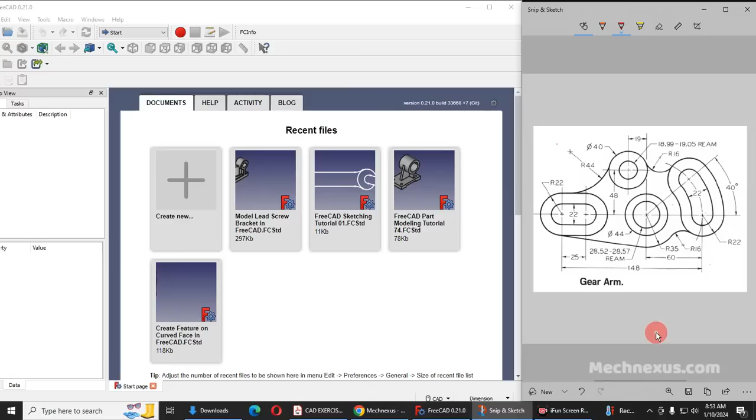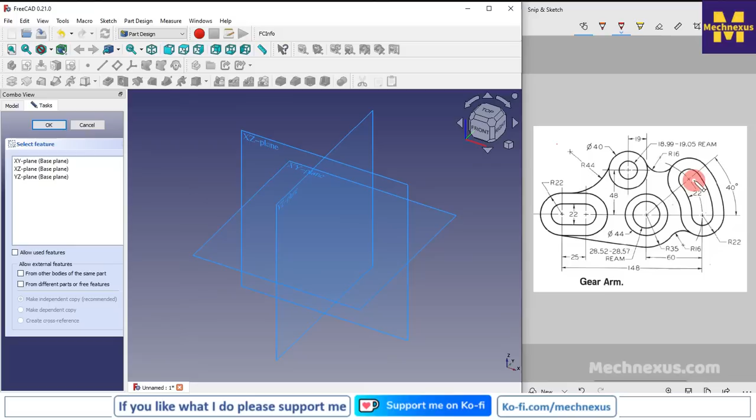So here I will close this startup page and I will switch to Part Design, create a new file, create a body, create a sketch. As we are going to just do the sketching practice, we will select this front plane and create our sketch. So before starting the sketch, we will understand the base feature of the sketching.

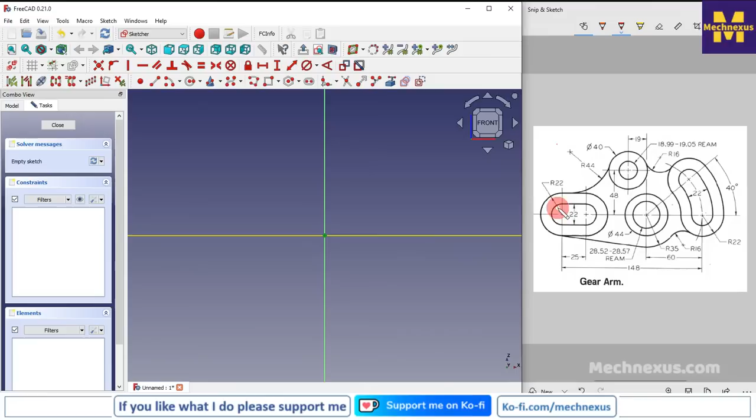If we read the drawing, we can find that these slots and this hole are the major features, and based on these major features we will make this one. So it is advisable from my end to target your base feature. In this sketch our base feature will be this circle at our origin point, and based on that we will draw one feature at a time and complete our sketch. So let's start.

So I will create two circles, and now we will read the dimensions: the outer one is 44 and the inner one is 28.57. We will consider the maximum. So first I will select the inner one and give the diameter 28.57, say OK, and now the outer one is 44. Now I will move my dimension. So this is the base feature which we have drawn.

Now we will make this slot feature. In sketching you will get the slot tool here, just to create a slot, and now we will give the dimensions. If we see here, this dimension 148 is from this slot center to this one, but this center to center dimension is not given. So what we will do, we will create a circle here with the circle tool, and this will be of diameter 22.

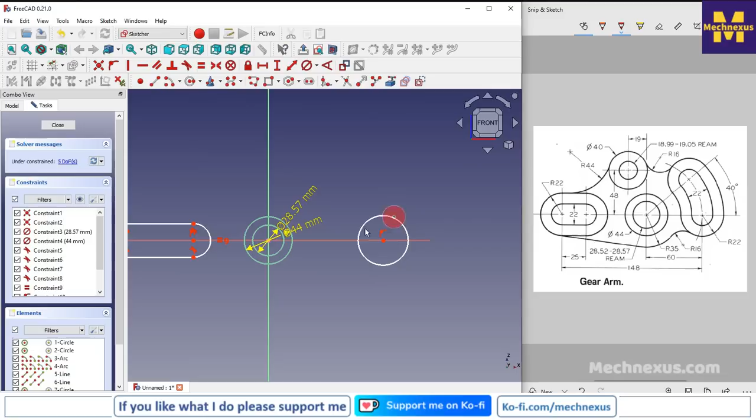And now from this base feature this one is 60, so we will select horizontal dimension and give it 60, and now this is 148, so I will select this one and this one and give it 148. Now I move my dimension.

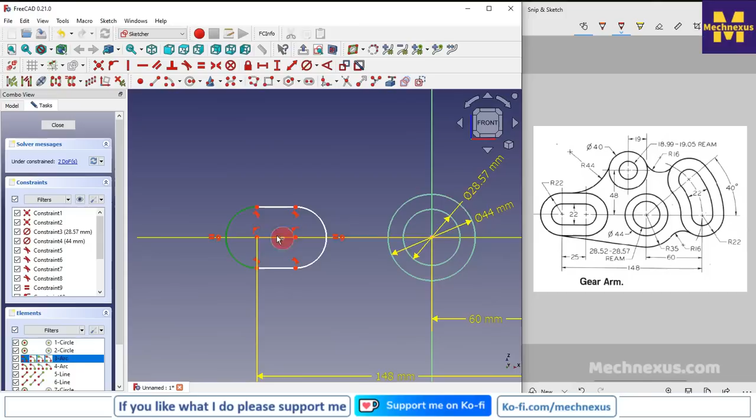Now I will select my slot and give it a diameter dimension, which is 22, and the center to center distance of this slot is 25. So I select these 2 points, give a horizontal dimension of 25, and I move it down.

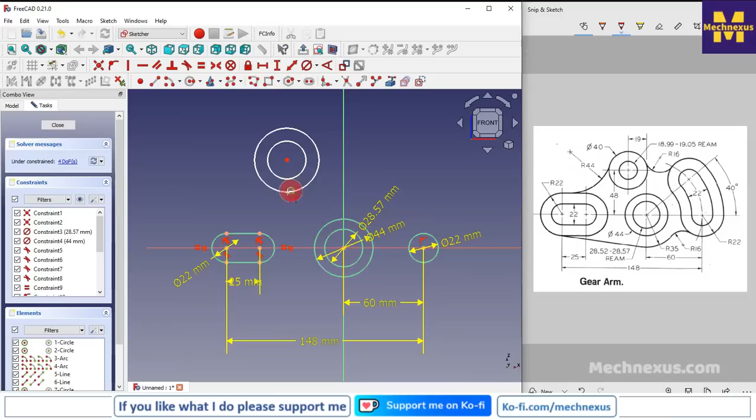Now we will create these two circles. So I will randomly create 2 circles, and now I will give the dimensions. The inner one is 19.05, select diameter and give it 19.05, and the outer one is 40.

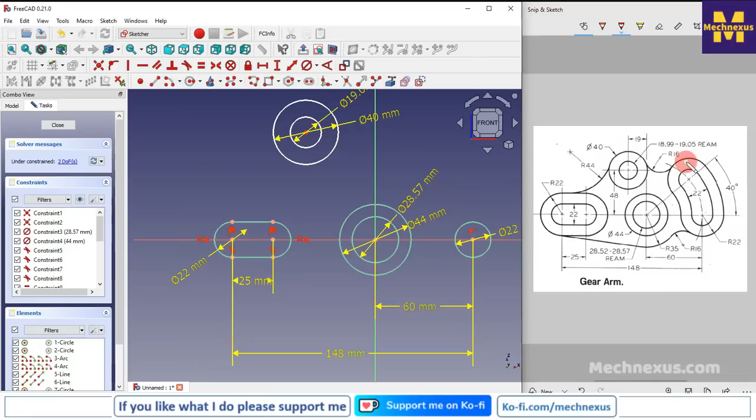So while creating the sketch, if you select one feature and draw this arc, then this circle, then again draw this arc, then make this, it will be time consuming. The smarter way to create a sketch is that first you create the base features and then you draw this arc. This will save you lots of time. So that is the best practice to create a sketch in less time.

Now we will give this dimension 48. From this to this it is a vertical 48 and horizontal is 19. So I will select these 2 points and give a horizontal dimension of 19. Now I move it to the outside so that you can clearly see the dimensions. Now I will move it here.

Okay, now we will create this slot. To create this slot, let's go to the slot tool. If you go to the slot tool, it will be the linear slot, meaning we cannot create a slot like this with the slot tool. So the best way is to create these two arcs. I will click on the 3-point arc and create the two arcs, and these two arcs' center is the same as our base origin center.

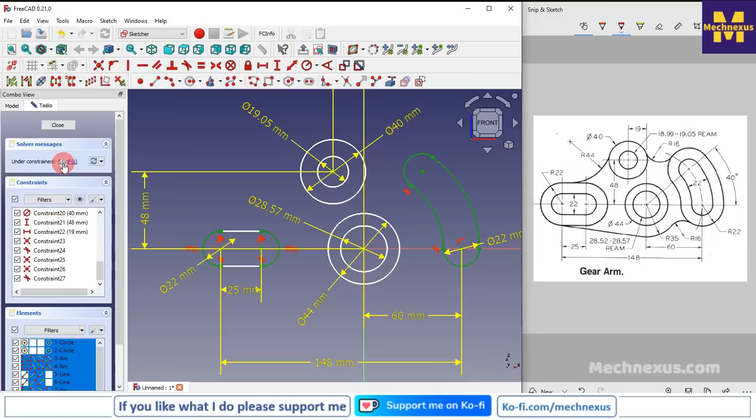Now let's see the conflict. The conflict here is a coincidence, delete it. So here you can see that our constraint has turned white. So let's see what happened. Here we have 5 degrees of freedom, and these 5 degrees of freedom are highlighted in this sketch. So let's fix it.

So nothing is moving here. Let's see here. So here is the issue. We will give the tangency on both sides, give the tangent. Now let's give the dimension.

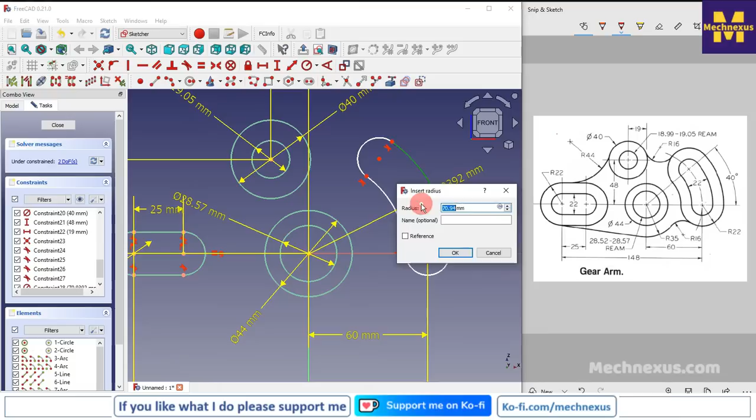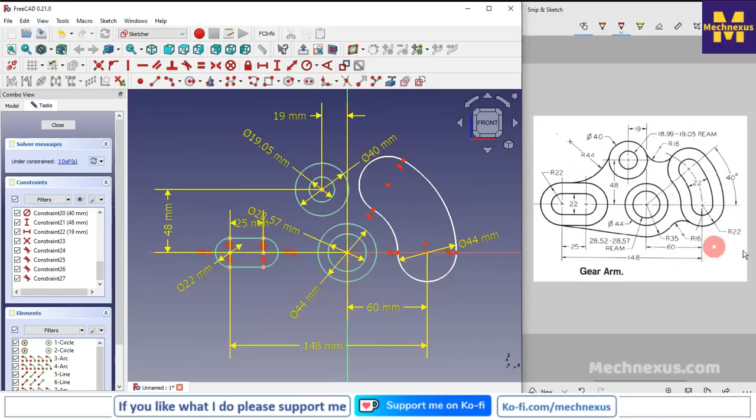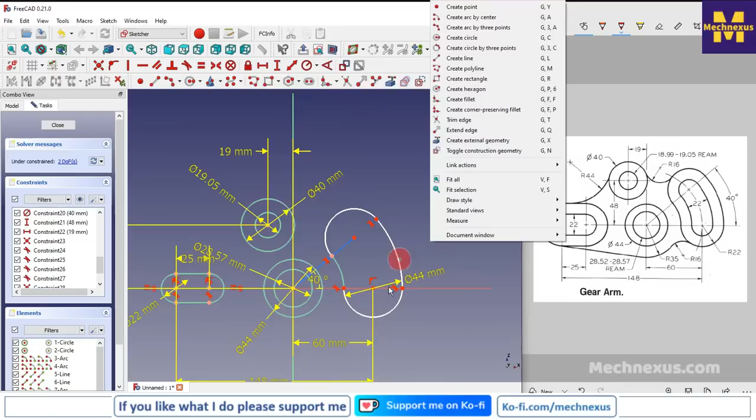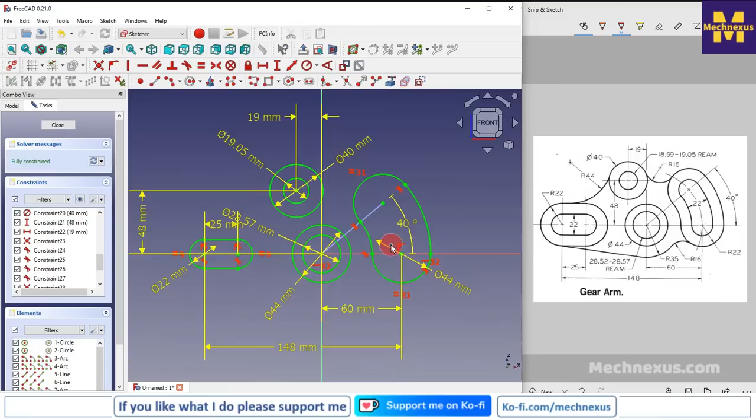So I will create a line simply joining these two, select it and make it construction. Select this axis and this line and give an angular dimension of 40 degrees. Now we will select these two arcs and make them equal, and I will move this 44 mm dimension. Now let's see what is unconstrained. We will simply select the point, and we can see that this point is not fixed, so we will simply give it a horizontal relation here. So now you can see that our outer one is constrained.

Now we will create this inner slot as well, and then we will complete our profile by creating this arc. So now let's create two circles here and here, and we will simply make them equal and give one of the circles a dimension. The inner one is 22, that means it is a diameter, so I will simply select it, select the diameter option and give 22.

And now we will select the 3-point arc and we will merge the center with our origin, say merge, and then select this arc and point, add the relation, simply this one, arc and point. Now all we need is to add the tangency relation. Let's see. So here, tangency.

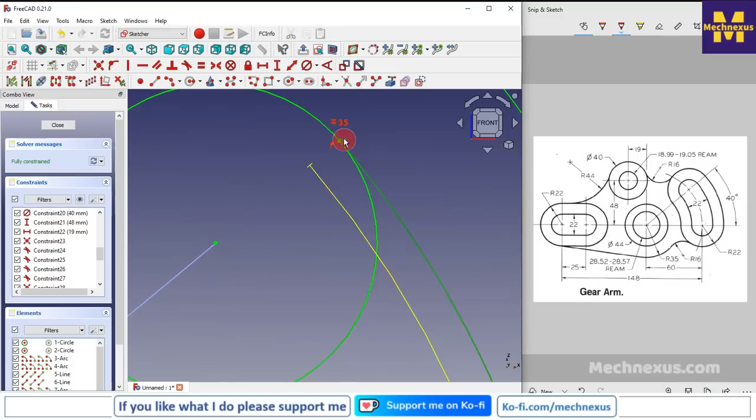So at this point you can see that it is a coincidence, so a tangency has already been added here because it is a constraint. If we add the tangency by selecting these two arcs, it will over-define the sketch. Let's try it. Okay, it's got added tangency there. So we can give coincidence plus tangency.

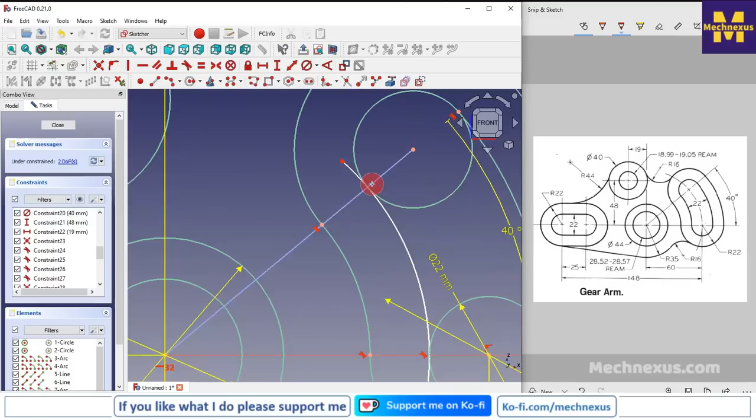Now again select the 3-point arc and create a rough arc, and this arc center is here, so merge with our origin, say merge. And now let's first make the tangency. Now here we can use one more tool. Instead of arc and point constraint, we can use the trim option. Once we use the trim option, it automatically adds the arc and point coincidence. Let's trim it and trim the inner one.

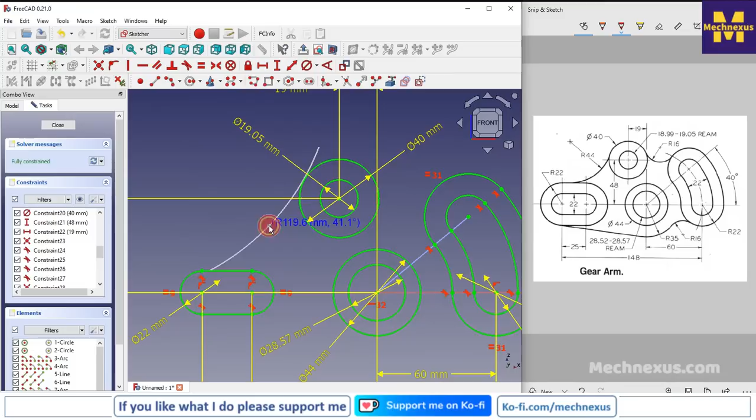So we have made all 4 base features. Now we will create this arc and complete our profile. I will move the dimension outside so that you can clearly see it. Now we will create this arc of 44. So I will select the 3-point arc. Now I will select this and add the tangency relation. Similarly this and this tangency relation.

Now I will select this point and this line and add the relation. So here is a conflict, which is a constraint 44. Let's delete it. So it will be something like this. Let's use the trim option because tangency is added. So trim it, and now let's see by moving the sketch. So here we are losing the one contact, which is the arc and point.

Let's delete it. I think the problem is we have not defined the radius dimension, so it is going outside, meaning it is tangent but this point is going outside. So we will simply click on the radius tool and give our radius 44. You can see that it is perfectly constrained. Now we will again select a 3-point arc.

Instead of using the 3-point arc, you can also use the circle and make this circle smaller and add the tangency relation here, and also add the tangency relation here. And now we can simply use the trim command and add our radius R16. Select the radius and give it 16 mm. So there are multiple ways to do things in FreeCAD. It depends upon your convenience, which tool you like most.

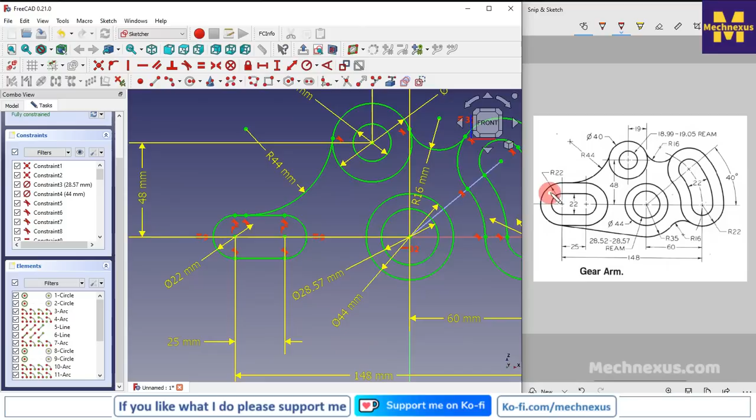Now we will create a line from here which will be tangent to this arc, and we will create this radius R35 and R16. So we have both the options, either we can try from here. If we see here, we do not have the angle dimensions given for this line, so we will start from here.

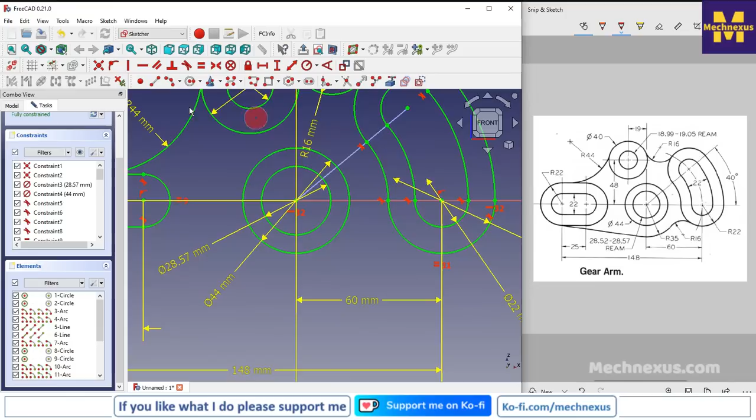So simply I will select a 3-point arc and create a rough arc, and I will add the tangency relation here, and then I will create one more arc and add the tangency here, and then I will create a line, and then I will add the tangency relation, and simply I use the trim tool.

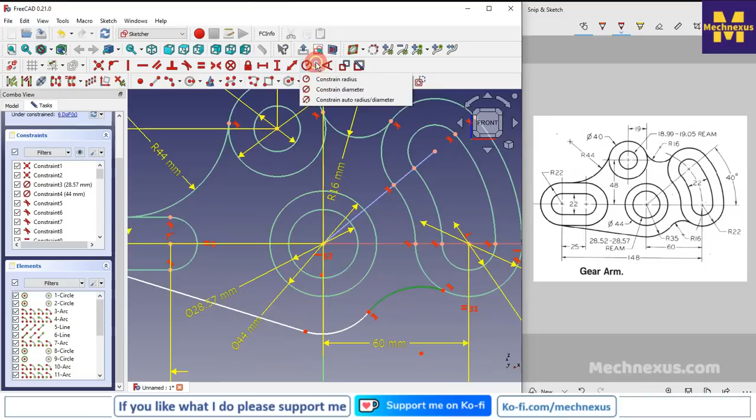So it is tangent, but if I use the trim tool, then it is completely removing the line. So what I will do, I will select this point and this arc and add the coincidence relation. Now we will give the dimensions, select this arc and give it 16 mm, and here tangency is not there, so we will add it, and this one is 35.

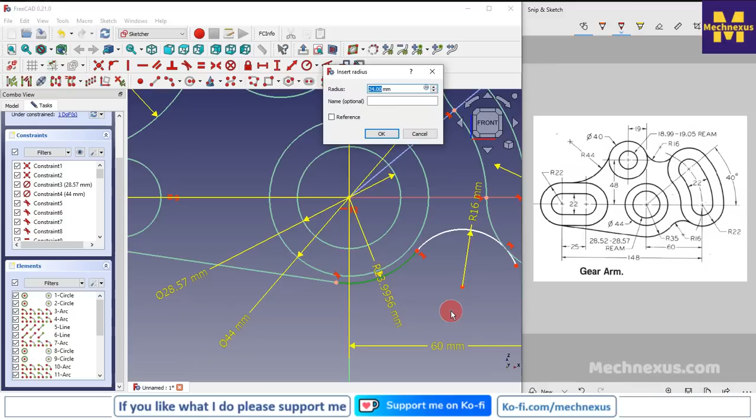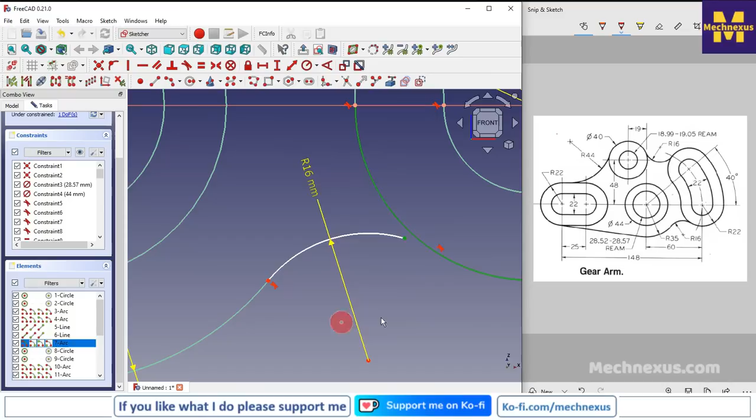We can see that this arc center is not merged with our origin, so we will select it and click on merge, and now we will give the radius and give it 35. So we have constrained it, but this arc is not constrained, so let's find it out. Here it is tangent, but it does not have a coincident relation, so we will select this point and this arc and add the coincidence relation.

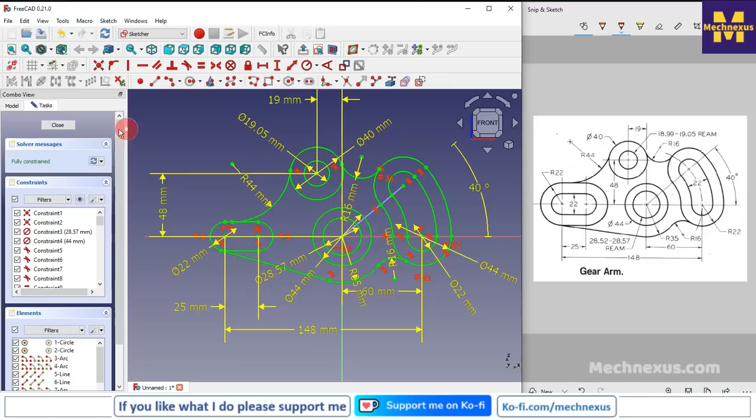So you can see how we have converted this gear arm sketch into the FreeCAD sketch with the help of the Part Design workbench. You can also use the Sketcher workbench, but from my side the sketcher inside the Part Design workbench is recommended. Now I will switch to the front view. Now you can see that we have learned sketching in FreeCAD and how we did it.